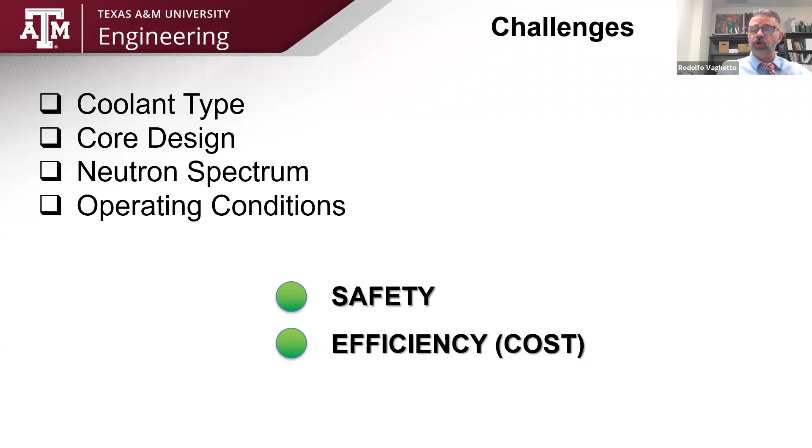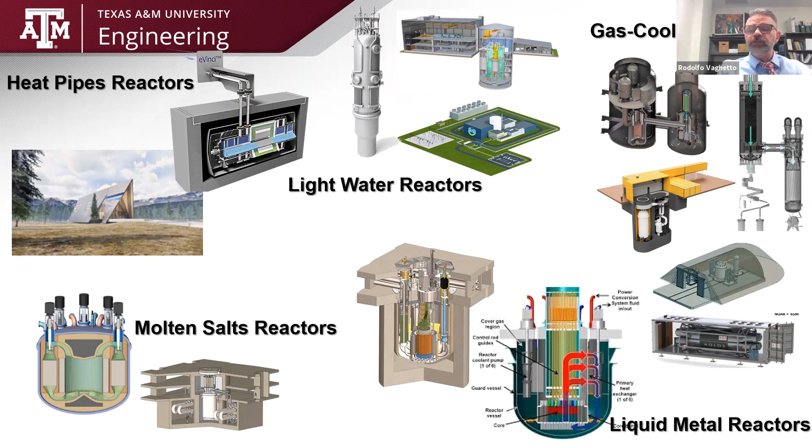Now, going back to this cartoon where I showed all the reactor technologies, I decided to select the liquid metal fast reactor, which is actually in the middle—a technology that is relatively mature compared to the molten salt and heat pipe reactors, but still requiring very active research and development.

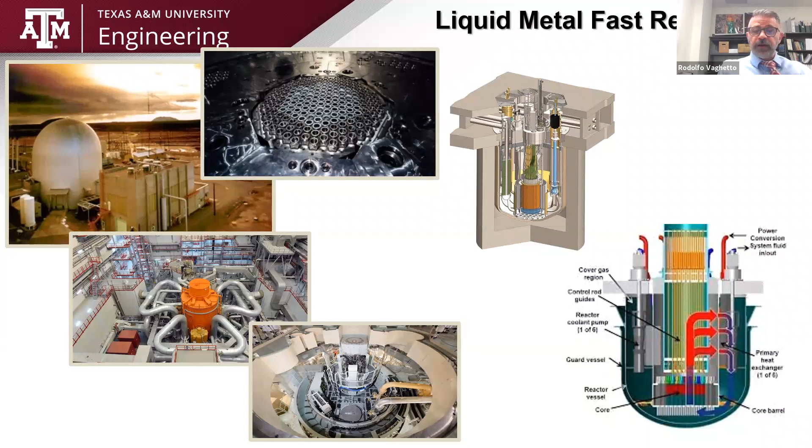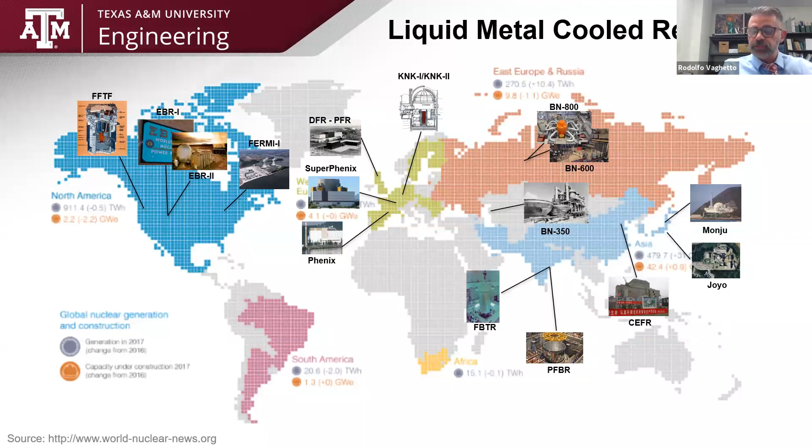The reason why liquid metal fast reactors are attracting such attention is because there are certain specific design challenges, not only because they use liquid metal as coolant. Here I mention three of the current options being considered, but there are also certain specific characteristics of the design, and I'll focus specifically on the core.

Fuel rod bundles in liquid metal fast reactors, just because you don't need to use a moderator, tend to have a more compact design. They change the lattice of the rods from a square lattice typical of light water reactor bundles to a triangular lattice. By doing that, you have a more complex thermohydraulic behavior of the bundle because of the smaller sub-channel flow areas. But you also have other challenges—you have higher core power densities, so you need to really understand the phenomena involved in the heat transfer from the core to the coolant.

In addition, there are several technologies currently under consideration for spacers. Spacers in the fuel bundles are used to maintain the lattice during operation, preventing pin displacement, while also reducing flow-induced vibrations. Some spacer grid designs, for example, are meant to increase heat transfer mechanisms, but every time you try to improve heat transfer, there's usually a drawback—typically the pressure drop through the core, which is an important parameter when designing a reactor, not only for estimating the required pumping power, but also for safety reasons.

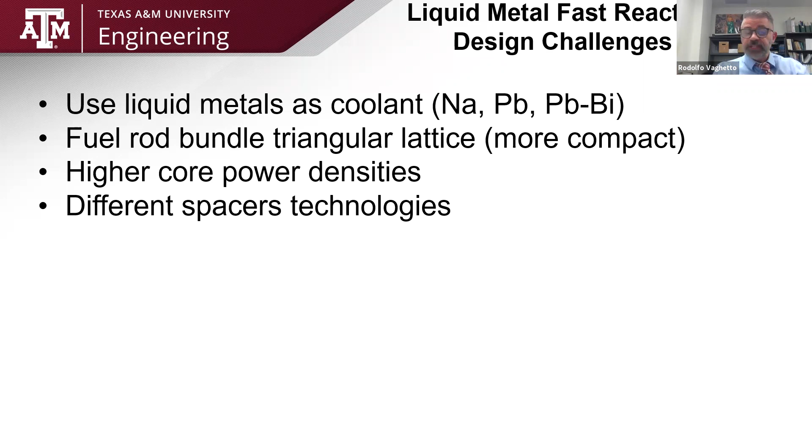I collected a selection of pictures of the current spacer technologies under consideration for liquid metal fast reactor fuel bundles. The one at the bottom is called the honeycomb grid. These two pictures aren't from Google—they're pictures of spacer grids we're currently investigating in our laboratory. I have one here with me; if the camera is on, you can see it. This is a typical spacer grid, 3D printed with stainless steel 304, mounted in a 127-pin liquid metal fast reactor.

And if you go to the picture at the top, it's another 3D printed spacer grid. This is used for gas-cooled fast reactor, while the coolant is different. As you can see, the geometry is very similar, and this was 3D printed with plastic material.

Both spacer grids are mounted in dedicated fuel assembly replicas that we are using to investigate the thermohydraulic behavior in this reactor core configuration. There is also another interesting spacer technology that probably most of you are familiar with, the wire-wrapped spacer.

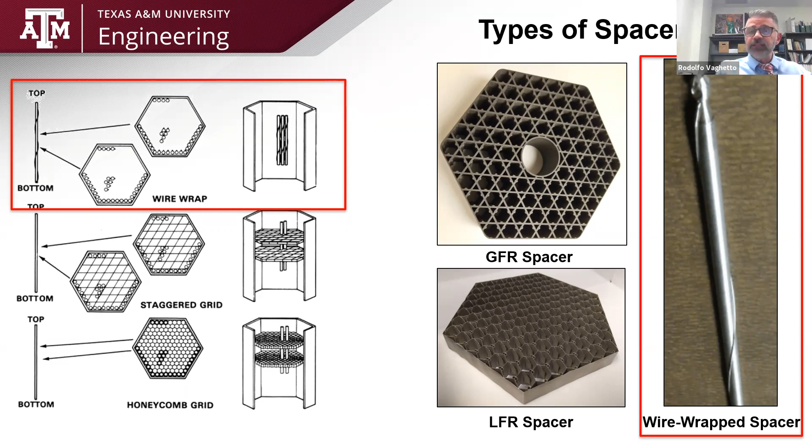And that basically motivated our laboratory, the Thermal-Hydraulic Research Laboratory, to build the test section that I'm going to show you in a couple of minutes. But before moving to that, I wanted to share with you the specific challenges when studying the thermohydraulic behavior of these bundles.

There is a very complex geometrical characteristic of the bundle: a triangular lattice, with a number of pins that can vary based on the location of the fuel assembly in the core and based on the core design needs. Usually these pins are enclosed in a hexagonal duct.

So between the outer ring of pins and the duct, you have a gap usually indicated with the letter W, and this is the edge pitch, and the P over D, the pitch over diameter ratio, which gives you an idea of how compact the fuel bundle is. And of course the helical pitch over diameter ratio, which may vary and tells you how finely the wire is wrapped around the pin.

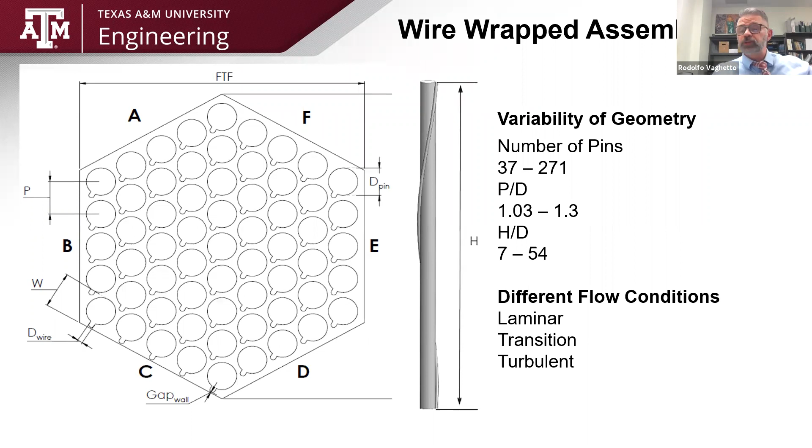So the facility and the test section were designed and constructed under a collaborative project with TerraPower, Areva Framatome, and Argonne National Laboratory. The test section is a 61-pin wire wrap replica.

It is made of acrylic, fully transparent, and the reason why we decided to fabricate this test section in acrylic is because we have employed high fidelity flow visualization and measurements that I will discuss toward the end of this presentation.

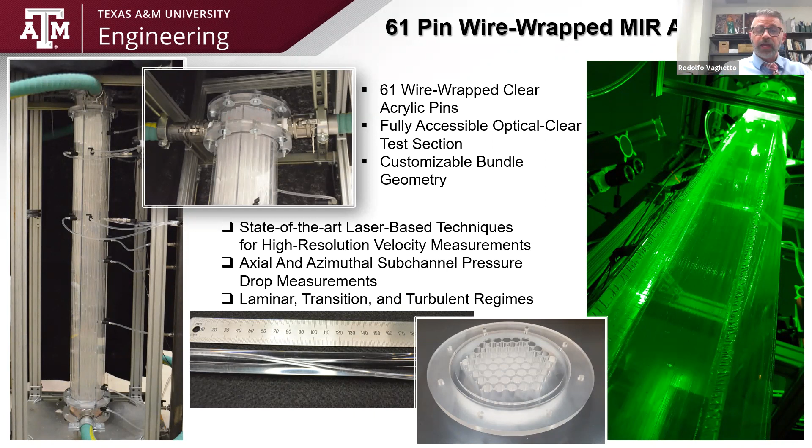The test section is connected to a forced convection loop. Here we have installed a primary coolant pump. The pump is basically used to establish the desired flow condition at the test section, to make sure the type of tests we can conduct with our test section are what we call isothermal tests.

So we can conduct tests to study the hydraulic behavior, the flow behavior within the bundle; we do not consider heat transfer mechanisms, but still these experiments are important for the reasons I mentioned earlier. There is still a heat transfer system here.

As you can see, there is a secondary system used to maintain the temperature of the primary loop under control. This is important because the fluid we use has specific optical properties that change with temperature, so it is important to maintain the temperature constant during the tests to keep the fluid properties unaltered.

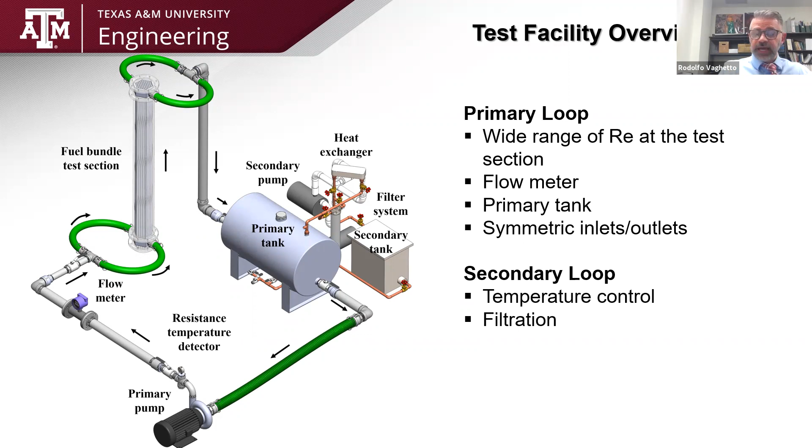And this secondary system is also used for filtration. We have a system level measurement of the flow rate. And as I will show you later on in the presentation, we have also a camera and a laser installed to conduct the flow visualizations.

This is an overview of the test facility with all the components that I just mentioned, so I will not talk more about the test facility. If you guys have any questions, you can ask me at the end if you are curious to know more about the test loop and the design of the test section.

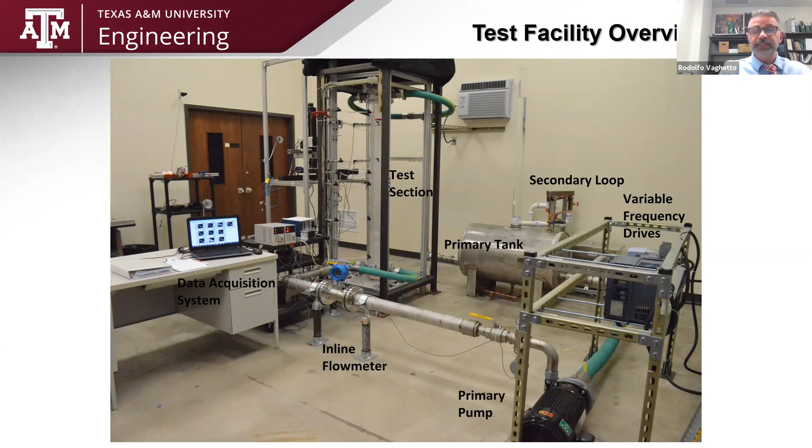Of particular importance is what I mentioned before, the edge pitch. This edge pitch for this bundle is relatively larger compared to any other existing experimental test bundle of similar geometry. And it's because the vendor wanted to explore the ability to increase the edge pitch to further increase the lifetime of the bundle. During operation, this bundle may undergo

thermal expansion and deformation of the pins and the duct. So having a larger edge pitch will allow for this thermal expansion, especially toward the center of the core. But again, you cannot work with a very large edge pitch, otherwise you have to face a large amount of flow diverted toward the periphery of the bundle.

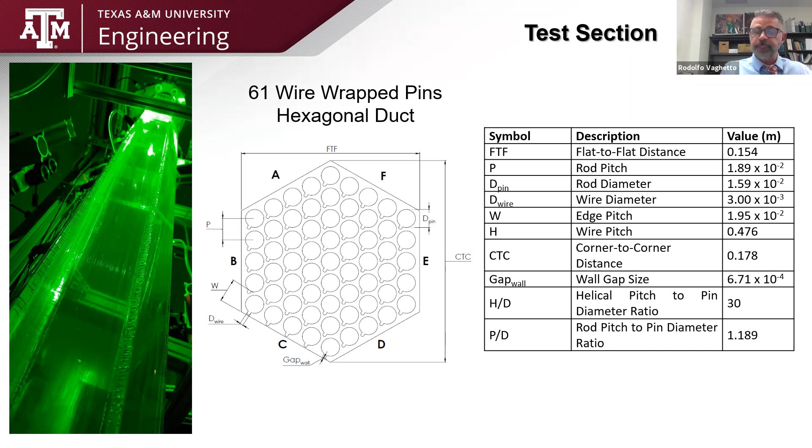So as I mentioned before, the combination of all these parameters and the variability of parameters like P over D, H over D, W over D, the pin number, the flow regimes - these are the main reasons why we have found motivation to perform additional experimental

tests. And there are different correlations available, for example, to predict the pressure drop and the friction factor in this type of bundle. I think you are familiar with the Cheng and Todreas correlation. This is one of the most used because it's one of the most validated correlations available for designers to use.

And these correlations are probably the ones that the large amount of experimental data will go to for validation or for improvement of the prediction. But recently also CFD computational tools have used this experimental data for validation of the capability of these CFD models.

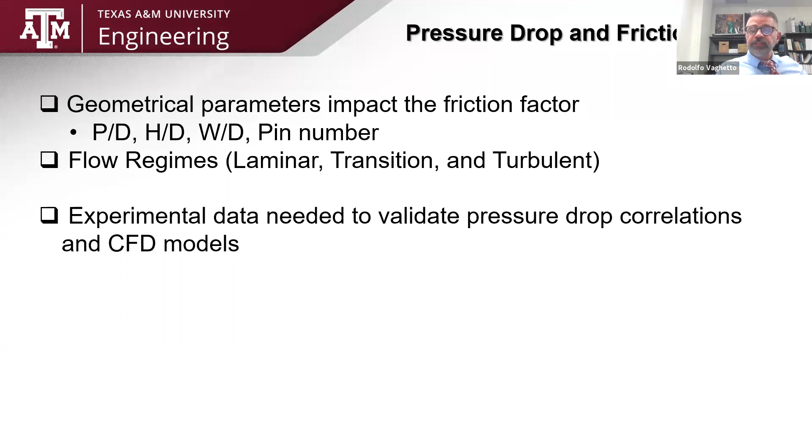Now, Cheng and Todreas recently have done a very extensive literature review to identify the number of experimental test bundles currently available and the number of experimental data points that they could use to further improve their correlation predictions. And they have identified 164 experimental test bundles around the world, including the one at Texas A&M University, with thousands of data points in the laminar, transition, and turbulent regime.

But for the reason that you can see at the top of the slide, these data points may appear to be a lot, but in reality, we really need more experimental data.

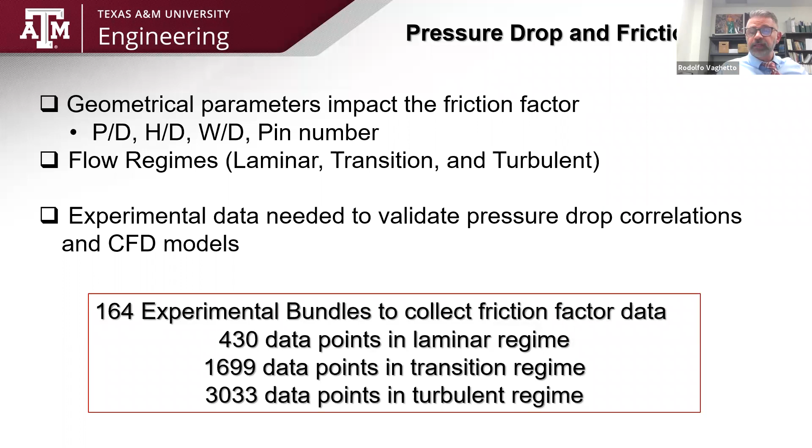As you can see here, for example, the laminar regime has not been really explored because historically researchers have focused more on the turbulent regime and then transition, but the laminar regime is of interest, and developers of correlations like Cheng and Todreas have found data points in the laminar regime useful for improving the predicting capability of their correlation.

So by reading the pressure drop over one wire pitch on the side of our test duct, we measure the pressure drop as a function of the flow rate. Then we normalize the pressure drop with the bundle average kinetic energy. And we plot in a log-log scale the bundle average friction factor against the bundle average Reynolds number.

There are a few other pieces of information that you can get from this experimental data. For example, by intensifying the experimental data set around the region where you are expecting the transition between regimes, you can actually identify as closely as possible the Reynolds number at which our specific bundle is transitioning from laminar to transition, or from transition to turbulent regimes.

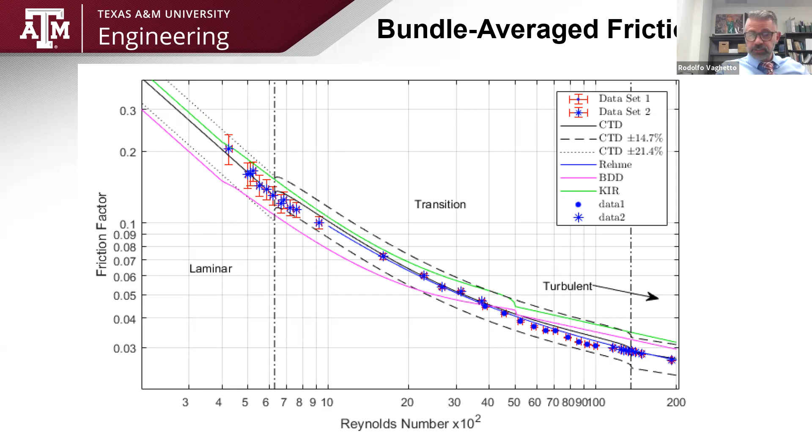One step forward in our experimental process was to go a little bit more in detail, and instead of analyzing the bundle average friction factor, we tried to be a little bit more creative and fill the experimental data needs, specifically in the interior subchannel regions.

Their prediction of the bundle average friction factor is a weighted sum of the local friction factor for interior, edge, and corner subchannel. So if you think about the large number of experimental data I mentioned earlier, those are experimental data for bundle average friction factor. But if you count the number of experimental data for interior subchannel local friction factor, the experimental data we have produced are really unique.

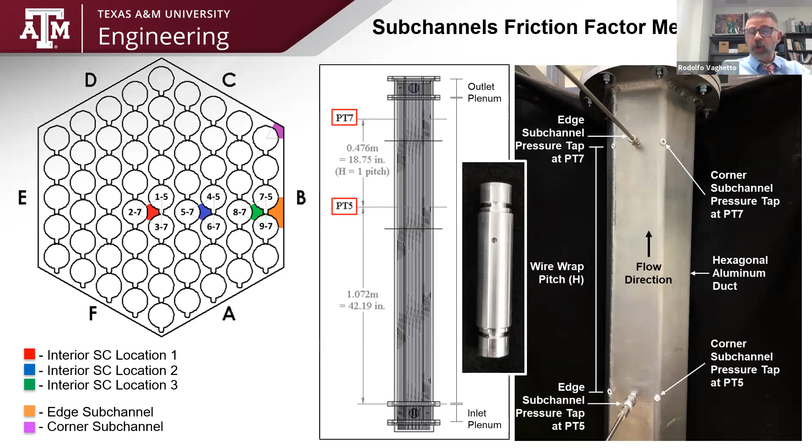So we measured the pressure drop, normalized it again, and plotted it as a function of the local Reynolds number, and we were able to show the local friction factor for 3 different subchannels: location 1, location 2, and location 3.

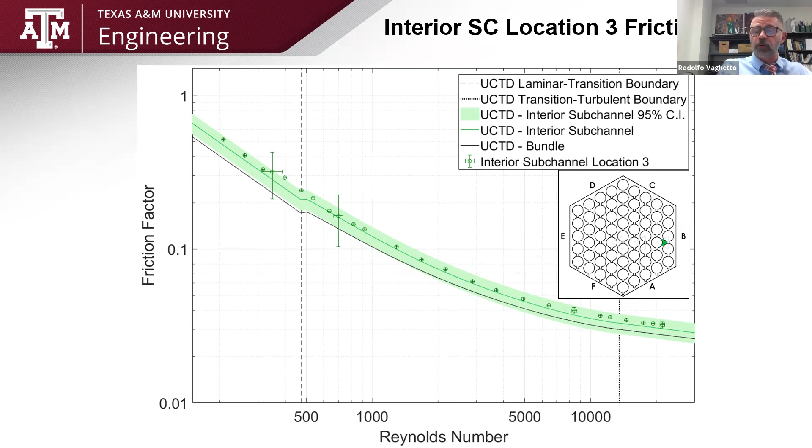What we noticed here is that there are no statistically significant differences between the friction factor among the interior subchannel when moving from the center toward the periphery.

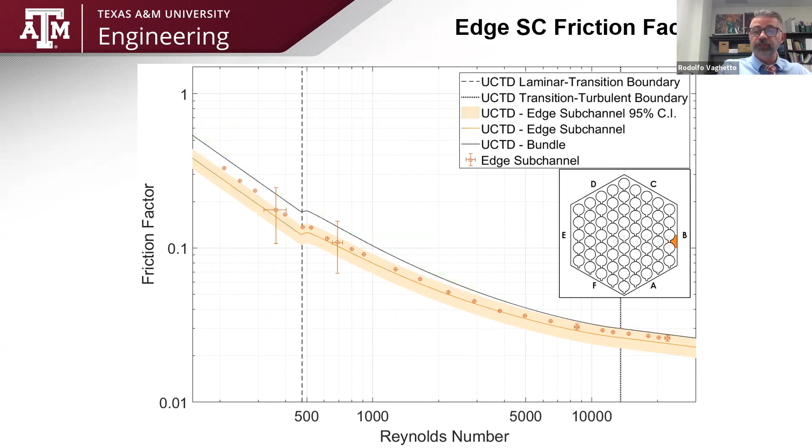But then there is also the prediction and the experimental results for the friction factor for the exterior or edge subchannel and for the corner subchannel.

In all the plots that I showed, there are two continuous lines, one of the same color as the experimental data, for example in this case for the corner friction factor. These are the prediction of the corner friction factor from the Cheng and Todreas correlation, specifically the UCTD, which is an updated version of the correlation proposed by Cheng and Todreas in 1986.

And then there is the black line, the bundle average friction factor, that will tell you what is the weight for each friction factor, for each subchannel, toward the bundle average friction factor. So this is one of the most complex experimental activities we have conducted, not only analyzing the bundle friction factor.

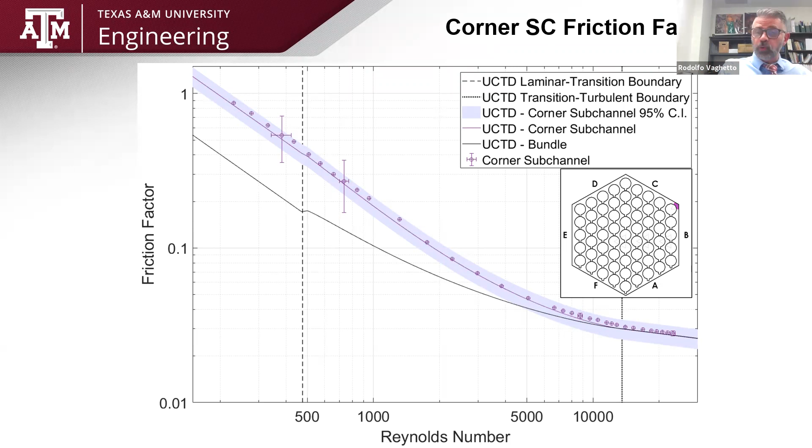We moved forward, and as I mentioned earlier, we were able to install different pressure taps at different azimuthal locations. So with the bundle of this geometry, with the wire rotating as you move downstream, as you move with the flow, you will realize that the distribution of the pressure across one specific cross section may be of interest to analyze and understand.

The reason is because azimuthal pressure is important to know for estimation of the forces acting on the pins. Subsequently, you can estimate the pin displacement, which is important, of course, for flow-induced vibrations.

So what we did is install a series of pressure taps at the midpoint of four faces, identified with the letters A, F, E, and D, at two axial locations. One is identified as PT5. It's in the fully developed region of the bundle, at a location where the wire is pointing toward the corner of these two faces, A and F.

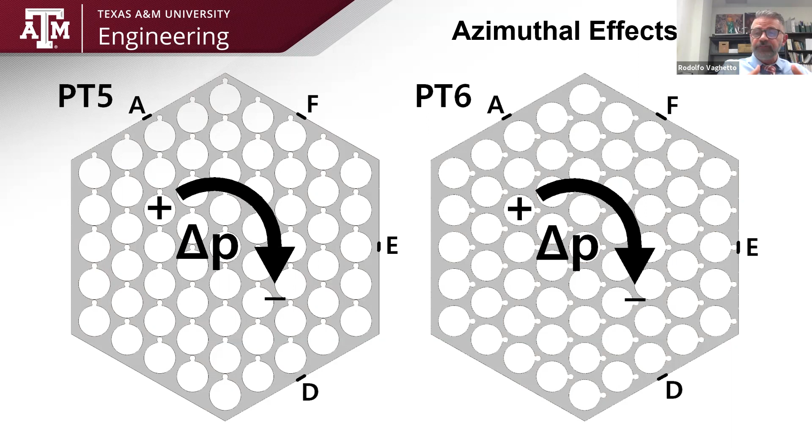Then we have another location, PT6, which is 3/4 pitch downstream of PT5, where the wire is facing orthogonal to face E. We measured the pressure difference across each adjacent face, and found different ways to plot the experimental results. Depending on how you plot the results, you learn different information on the flow behavior in this type of fuel assembly.

One important takeaway, for example, from plotting the normalized azimuthal pressure difference as a function of the angle of the wire compared to the corner between the two adjacent faces, is that there is a maximum pressure difference between the faces when the wire is actually pointing at the corner, basically at theta equal to 0.

We have also learned, though you may not see it in this plot, that by plotting in a different configuration, when you increase the Reynolds number, you get a larger cross flow, and the cross flow impacts the pressure distribution across the same plane. So the Reynolds number, which normally affects the bundle axial friction factor, in reality also affects the pressure distribution at each cross section.

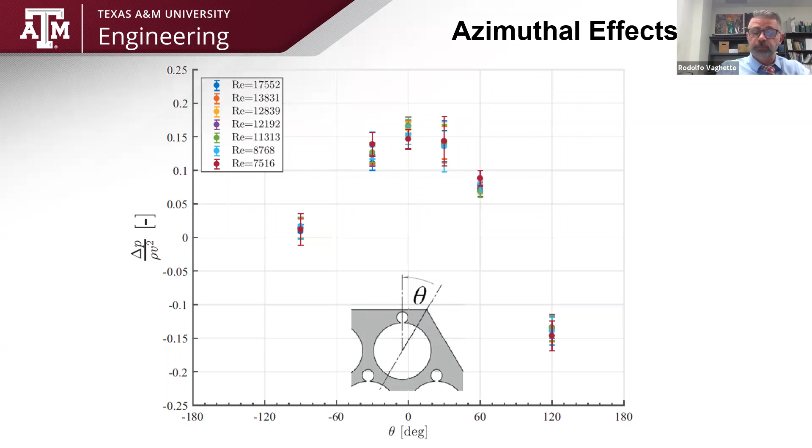One of the last activities that has kept us busy for about 2 or 3 years now is the estimation of the effect that localized blockages may have on the flow behavior. Here I'm talking about pressure drop again.

Because the flow area of this subchannel is relatively smaller compared to a typical light water reactor design, these bundles are more prone to accumulation of debris, which may create a localized blockage. With the reactor core instrumentation, it's really very difficult to identify the presence of these localized blockages. But a localized blockage may have a very strong effect on heat transfer, and subsequently you can have a failure of a pin that basically can go undetected.

So we used a systematic approach here because these blockages may not have a very regular shape, and even the accumulation of debris may result in a blockage that is not a full blockage of the subchannel. It may have also a certain level of porosity. But if we wanted to study how the flow area blocked affected the pressure drop, and how the location of the blockage may play a different role in the bundle friction factor, we created very regular blockages that we were able to characterize with conventional methods like calipers, but also with digital methods.

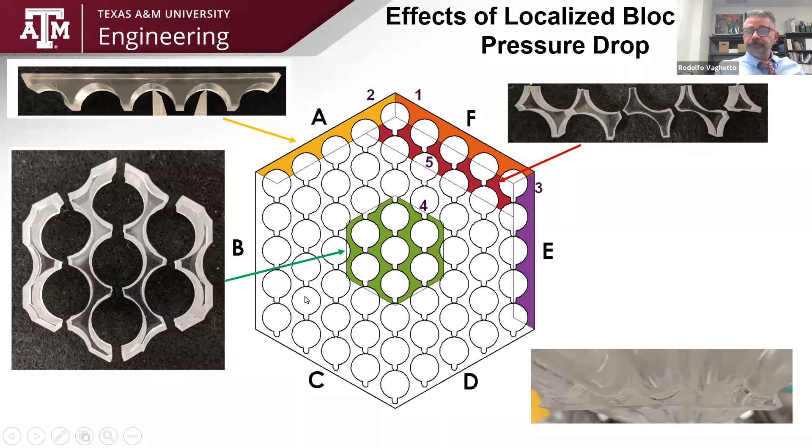So we know the exact flow area we were going to block, and we created different configurations. We have actually explored 6 different configurations of blockages, where the blockage has been located at different locations in the bundle. By measuring the pressure drop across one pitch within which this blockage is inserted, we were able to study the effect that this blockage has on the bundle average friction factor.

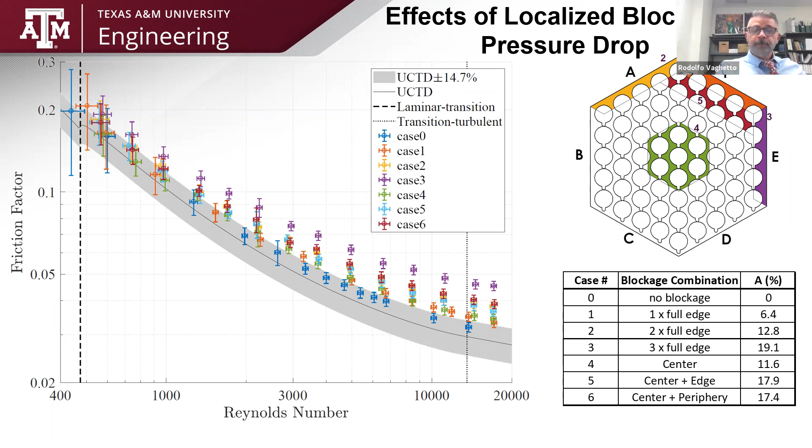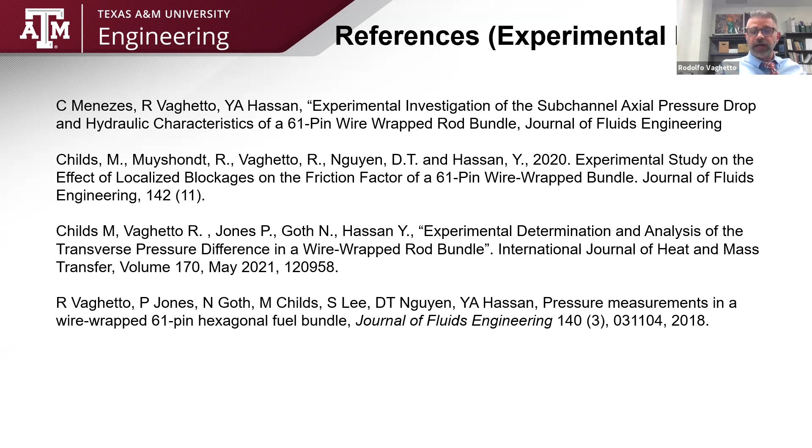For those not familiar with the flow visualization techniques we have adopted, the bundle has been built in acrylic, and we are applying what is called the matched index of refraction, MIR, technique, that consists of using a special fluid. It's called p-cymene, which has the same index of refraction as acrylic. When you couple the liquid with a clear solid material with the same index of refraction, you have this clear feature of the bundle.

This allows you to visualize the flow not only near the wall of the duct, but also within interior subchannels. With some corrections and other algorithms in place in our lab, we are able to reconstruct the 2-dimensional flow fields at different locations in the bundle. We combine this technique with what is called particle image velocimetry.

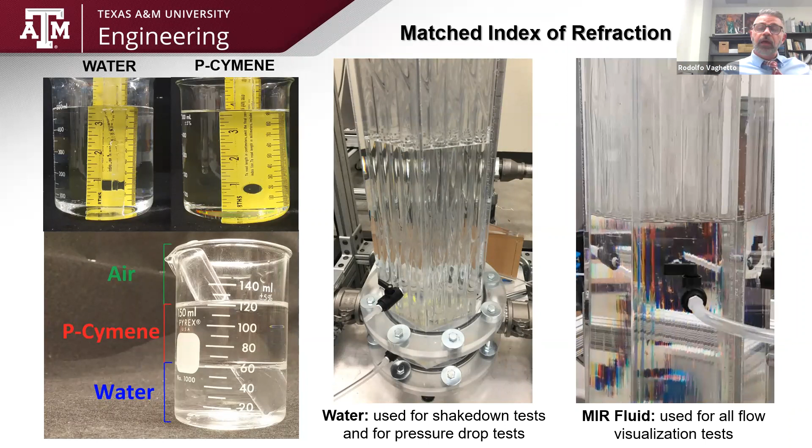This technique consists of seeding the liquid with small particles, having a laser sheet illuminating these particles, and measuring the flow field by looking at the motion of the particles that are faithfully following the flow in the bundle. With these two techniques, we have basically produced a relatively large amount of experimental data of flow fields.

These are more CFD level experiments, in other words, experiments that can be used for validating CFD. As a matter of fact, a selection of these experimental data are currently shared with the project I just mentioned, led by Dr. Avramova, that will be part of an international benchmark exercise where people from around the world use their own CFD methods and tools and use the experimental data to validate their computational capabilities.

We have applied PIV for 2D flow measurements, and we have also applied what is called stereoscopic PIV, which gives the ability to measure the axial component of the velocity within a cross-section of the bundle. Again, we have used the same technique adopted for measuring the pressure drop by installing localized blockages, but now showing how the flow structure is impacted upstream and downstream of the blockage by the blockage itself.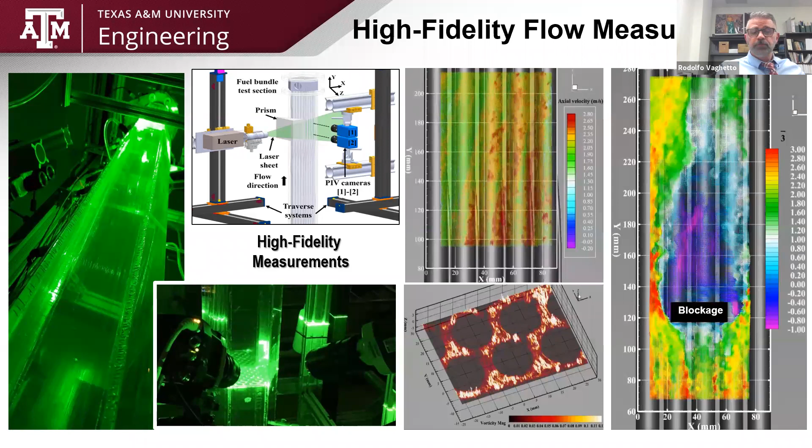This is the very last slide of the presentation. In the next few minutes, I want to give you an overview of the capability of the Thermal-Hydraulic Research Laboratory, because we do a lot of research, not only for this specific wire-wrapped fuel assembly, that anyway is one of the most active experimental and computational activities we are conducting right now.

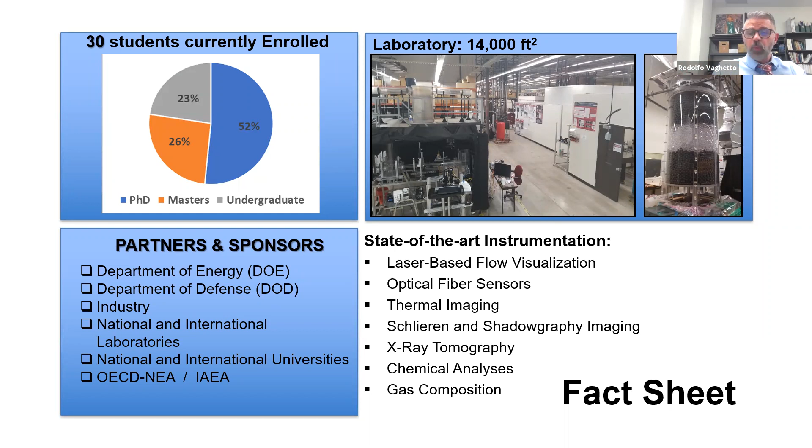We have approximately 30 graduate and undergraduate students currently enrolled in our laboratory. We have partners, and we work with the Department of Energy and Department of Defense. We have a strong collaboration with industry. We are fortunate to collaborate with national and international laboratories and universities. Some of the experimental activity and results we decided to share with international benchmarks, including the one I just mentioned with Professor Avramova.

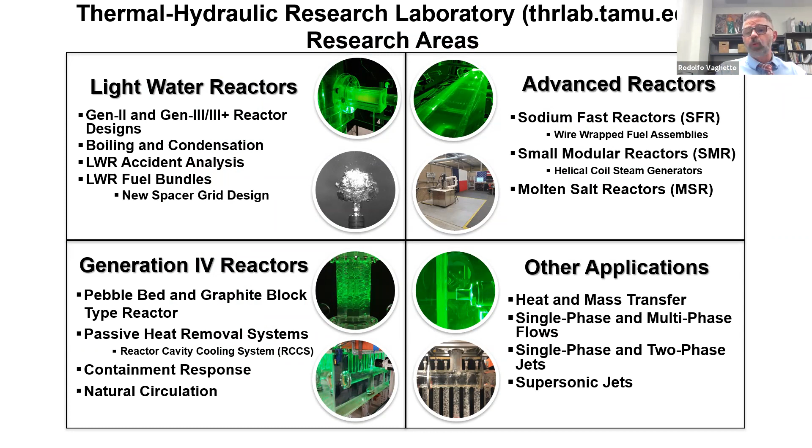We have developed techniques for measurement and simulations, and we currently support research and development in pretty much all the reactor technology that I mentioned in my slide number 1. We have in recent years expanded our research and development interest toward non-nuclear applications.

We have supported the light water reactor industry. We have 3 light water reactor test bundles here in the lab, 2 that have been used for flow visualization and high fidelity measurements, and the one on the far right is a test facility that can operate at relatively high pressure and temperature for critical heat flux measurement.

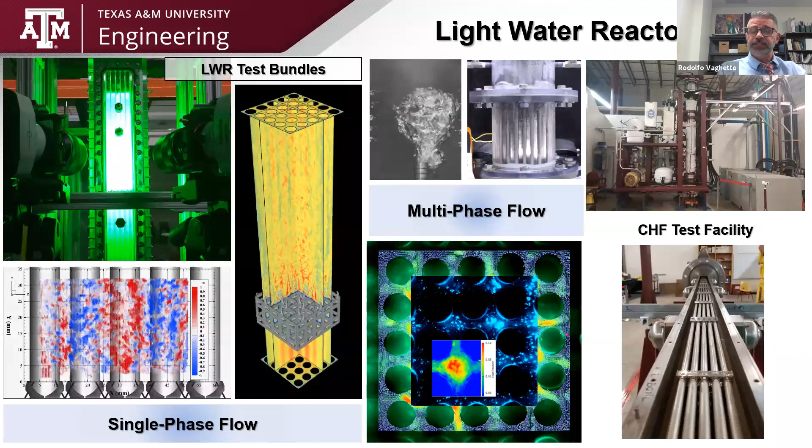We have done single and two-phase flow measurement. And of course, we are engaged not only in the experimental part, but also we do a lot of computational work with system level and CFD level codes.

We have installed a few weeks ago the NuScale small modular reactor simulator. This is one of the simulators that NuScale has installed, and it's actually an amazing tool.

It allows students to run any accident scenario. Predefined accident scenarios can be executed, but we have the ability to access basically every component of the power plant, so we can basically create any type of transient. We have access to the plant operating procedures, so students are able to shut down the reactor.

Students can do refueling, start up the reactor from cold shutdown, change the power, and do many other operations, and it's all digital. The simulator represents a power plant with 12 units, and you can operate all 12 units at the same time.

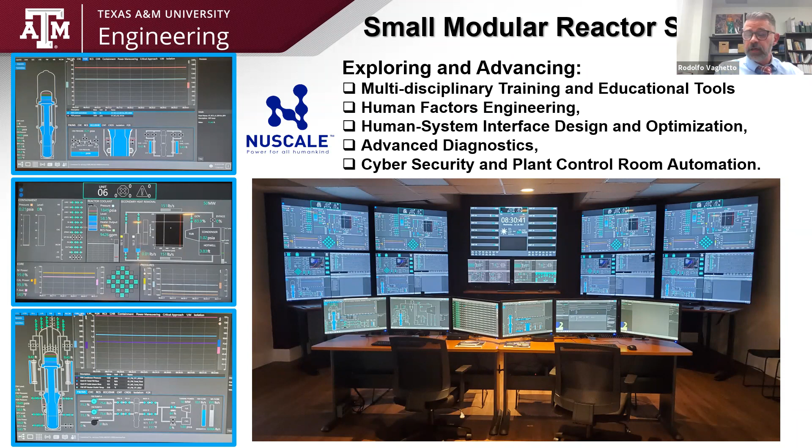We have also supported the development and research for high temperature gas cooled reactors. We have test and simulation for pebble bed and graphite block gas cooled reactors. We have also recently started an activity for rod bundle gas cooled reactors.

The picture you see in the movie on the left is one of the most used passive safety systems that was designed for gas cooled reactors, but it's now increasingly adopted for other reactor designs, including molten salt, for example. This is the reactor cavity cooling system.

And if you guys know David Holler, Dr. Holler was a student here, and his PhD was basically conducted using this experimental facility.

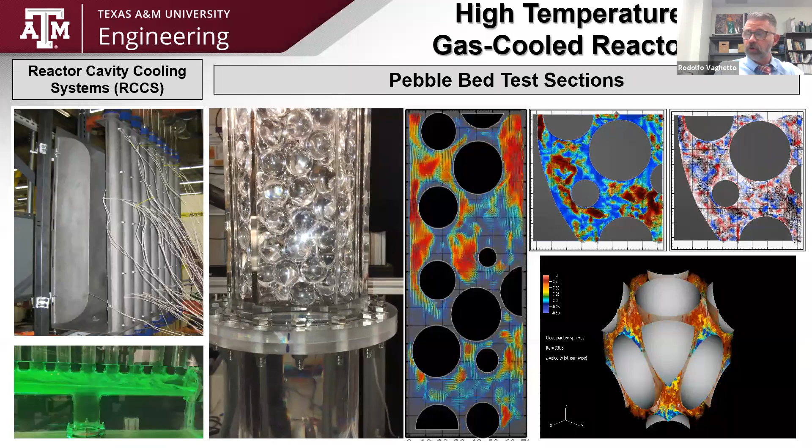We are currently working on molten salt reactor technology as well. We started this experimental activity approximately 2 years ago. We have built 2 forced convection test loops, as you can see on the left side. We have employed techniques for measuring flow rates, pressure, and temperature that in high temperature corrosive environments are very challenging.

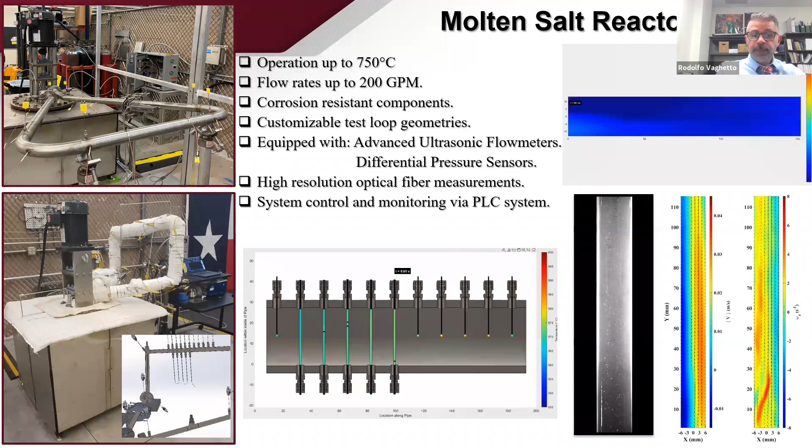We have also conducted flow visualization using PIV in molten salt. Some of the molten salts, like FLiNaK, are transparent at high temperature. As I discussed mostly during the presentation, we are also working on fast reactor technology.

We have 3 fast reactor bundles here. The one from TerraPower that I discussed during this presentation, we just built a bundle for Westinghouse Electric Company for their lead-cooled fast reactor design, and this is a 127 pin bundle. Then we have a bundle for the GA gas-cooled reactor, an 87 pin plus a central rod, and this is already in operation.

We have done some experiment and simulation also for upper plenum mixing, which is one important phenomenon for fast reactors.

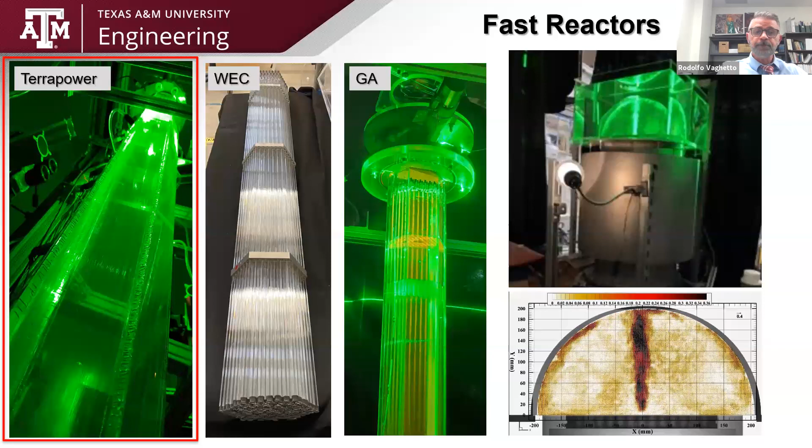This is my last slide. If you want to know more about the activity, or if you want to know more about the wire-wrapped fuel assembly, you can go to the website of the Thermal-Hydraulic Research Laboratory. With this, I will conclude my presentation, and you are very welcome to ask any questions you have.

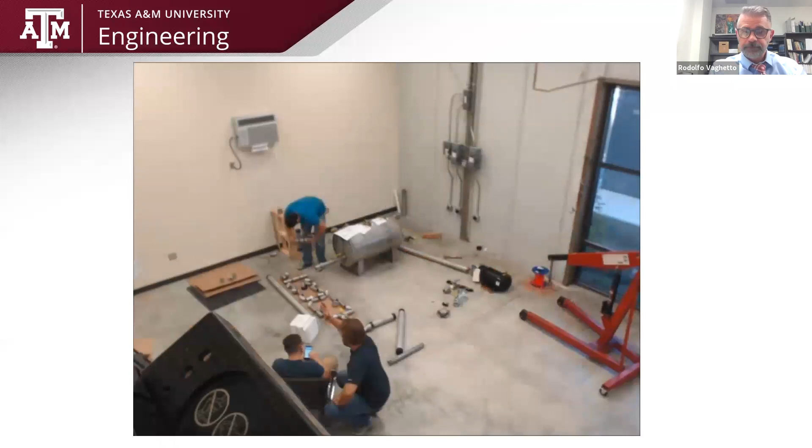Thank you very much for your presentation. It's wonderful.

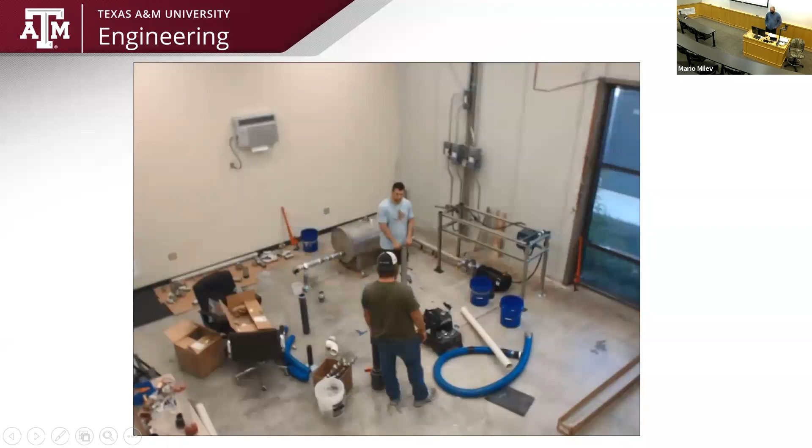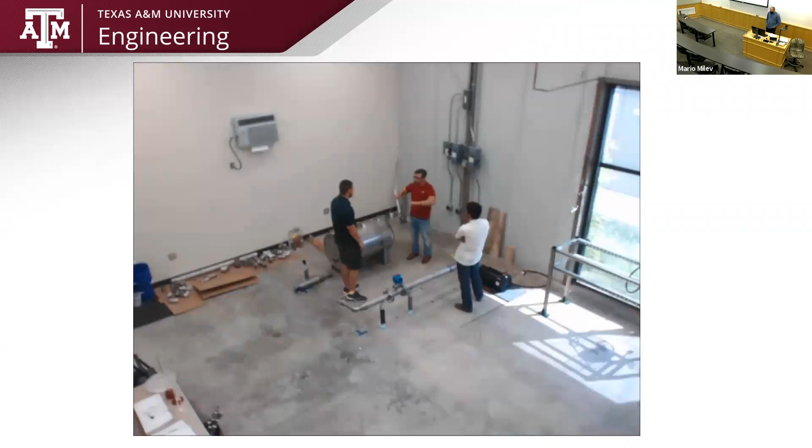While we're waiting for people, I was curious, I'm not a reactor core guy, but how much torque do you get on those fuel assemblies? I have to imagine those things are like a big propeller when you're spinning fluid through there, especially something like a liquid metal.

Is that an issue? You need to consider the force that the flow itself applies to the bundle when it moves upward. The spacers are usually meant just to provide space, but the axial location of the bundle is fixed by some upper and lower nozzles. So the bundle is connected to an upper and lower plenum, so there's no way it can move axially. You have relatively large forces depending on the type of spacing technology, but this is not in principle an issue because there are other attachments at the bottom and top of the core that prevent the fuel assembly from moving.

But the wire wrap doesn't put an azimuthal torque on it? It starts to, imagine it's twisting those things. Well, if you look at the pressure distribution I mentioned, that is very important. The pressure forces that develop because the wire creates a transverse flow are actually important to know, because they may cause pin displacement. It has an impact on flow-induced vibration, which is why we are conducting this experiment. This is a major difference from a light water reactor, where you don't have these radial forces induced by the wire.

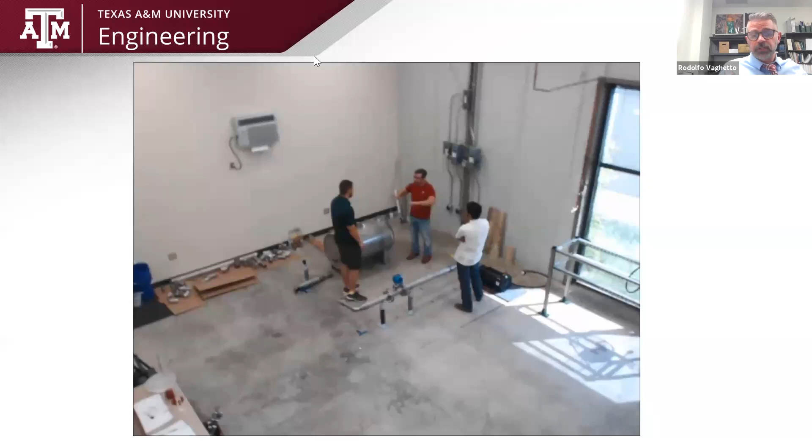Measurements near the wall, within the boundary layer, in the extreme vicinity of the wall, are very challenging, and everything depends on the light, the illumination, and the calibration you are doing near the wall. So there's not a direct answer. In principle, the MIR method works, but it depends on the combination of your light source and the ability to see the particles near the wall without any other disturbance, most likely reflection from the wall. That's what increases the uncertainty to the point that you really need to not consider your experimental data near the wall. This answer depends on your geometry, your setup, and your flow conditions as well.

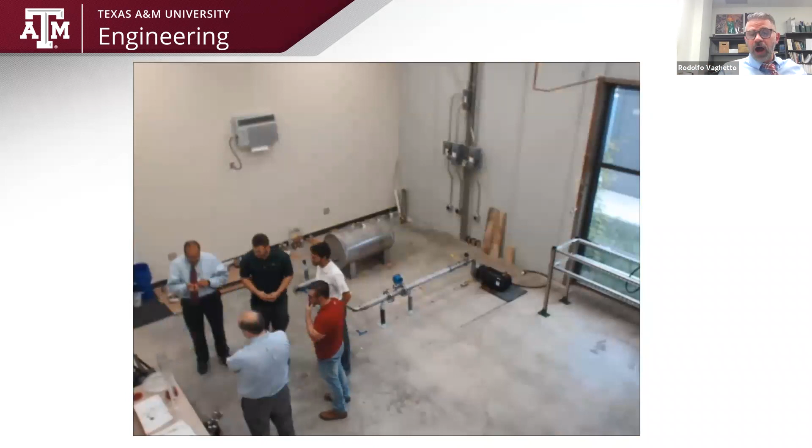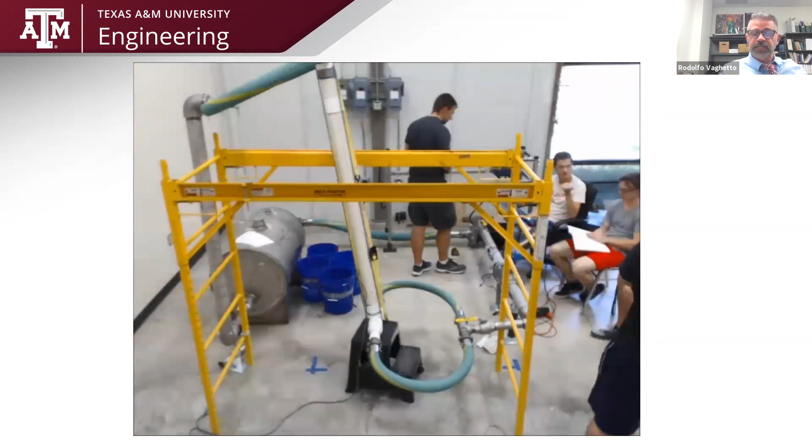There's other research you can do, for example further improving the matching between the liquid and the solid. This is something we've done in our lab—instead of using the coupling of p-cymene with acrylic, we've explored other materials and liquids that give even better and more limited distortion when you run the experiment. So you have two ways to work here: one is to quantify uncertainty, which is mandatory for any experiment; the second is to try to minimize distortion by using more sophisticated fluids and clear solid materials.

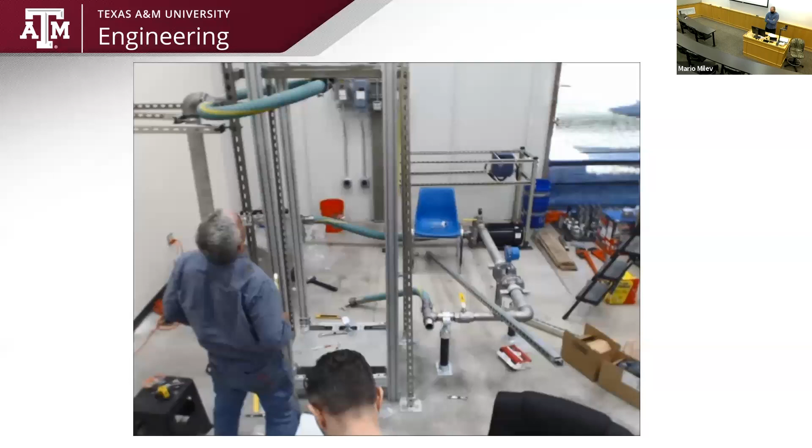I'm watching this time-lapse video, and I'd be curious to hear what kind of safety nightmare it is having that laser light reflecting off of everything while people are in the room. That must have been fun.

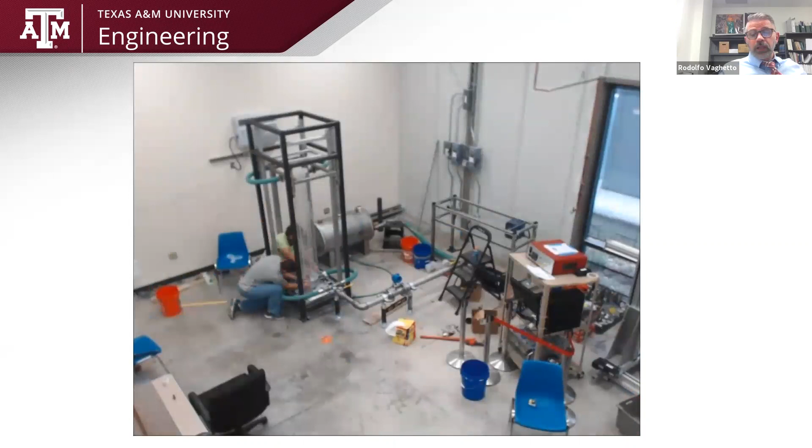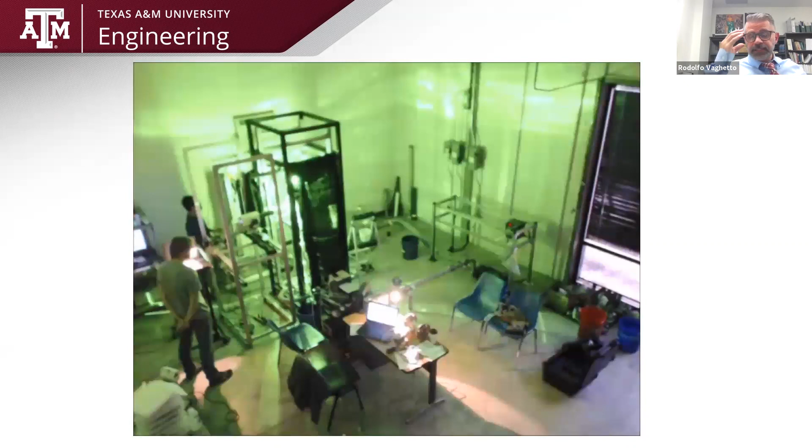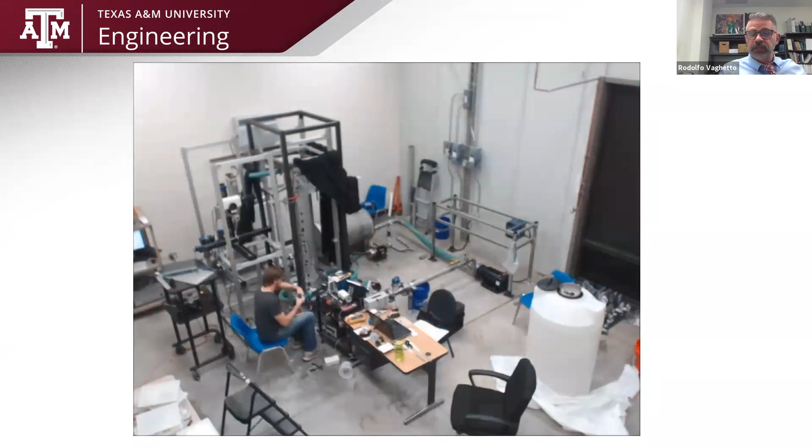Oh yeah, well, in fact this is a closed room, and everyone using the laser needs to have safety goggles on. The safety goggles basically screen the laser at that specific wavelength, and that's how you prevent issues and maintain safety when running these experiments.

Still, it's impressive. I could just imagine our safety guy having a heart attack if he saw this. This is impressive.

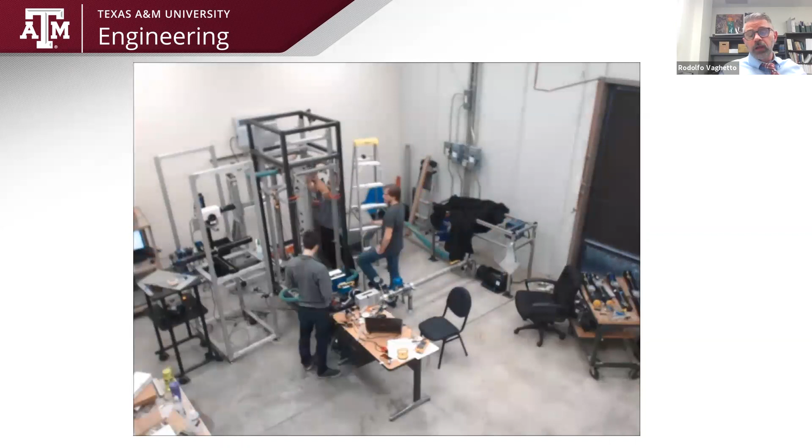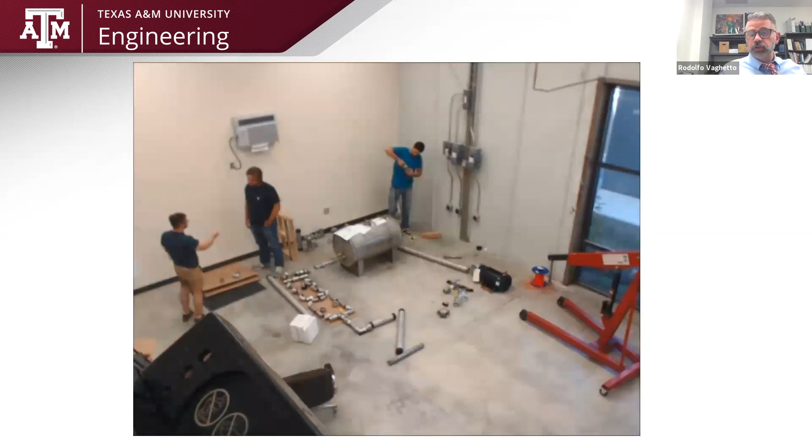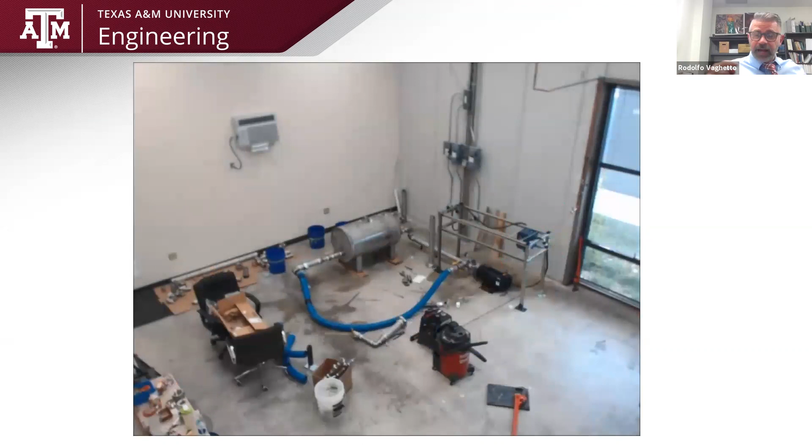Well, our safety guys too—that's a major issue when you set up an experimental activity like this, making sure there's an area that's under control. You have safety features to turn off the laser if someone accidentally opens the curtains or the door. There are sound and light alarms everywhere in the laboratory. And everyone, even those not allowed to use the laser, needs to take laser safety training because they need to know how to cooperate with the experimental activity going on in the lab.